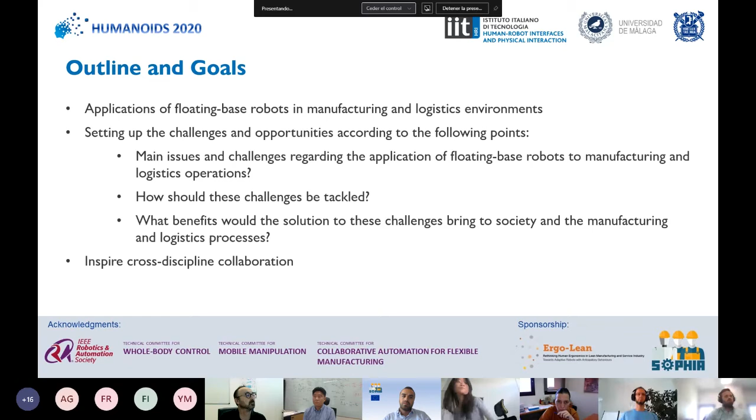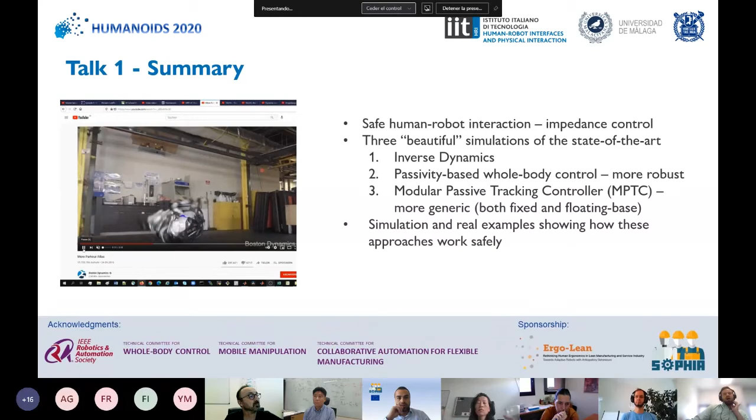So let's go forward. So the first talk is given by Dr. Johannes Englsberger from the German Aerospace Center, or the DLR, and this talk is entitled "Who Will Dare to Work Side by Side with a Potentially Exploding Robot?" And he's giving some thoughts and insights about truly robust and safe floating-base robot controllers. So I will just give some of the points he mentioned in his talk.

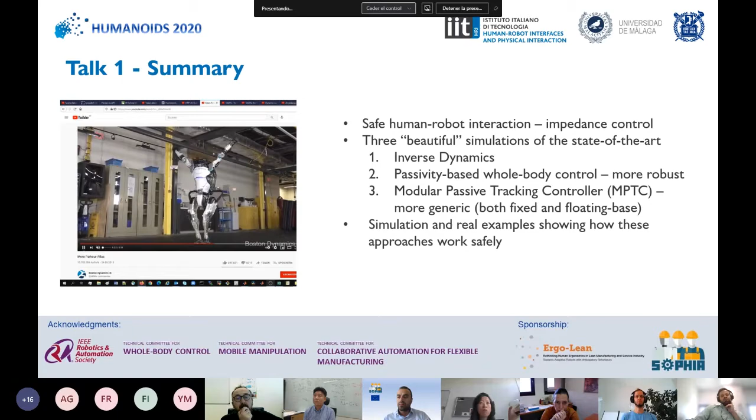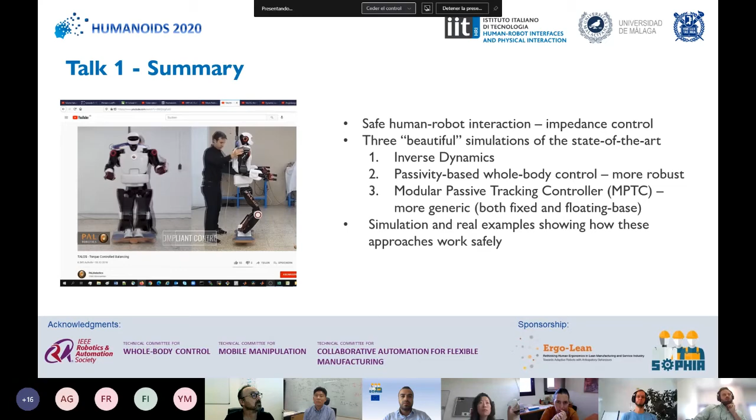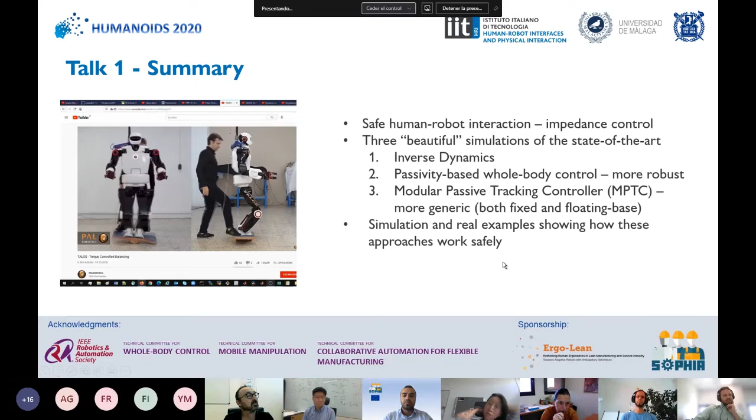So his talk is related to safe human-robot interaction, and he said that to achieve this safe human-robot interaction, the best approach is to use impedance controllers, in which case we need torque-controlled robots. This talk is related to humanoid robots. And he presented, as he said in the video, 3 beautiful simulations of the state-of-the-art controllers, which are these 3.

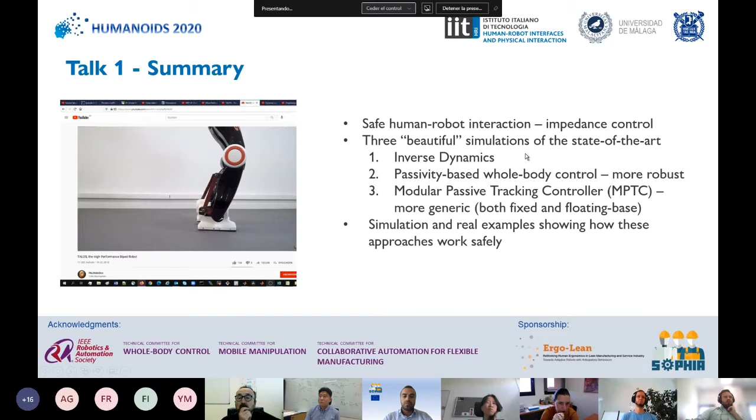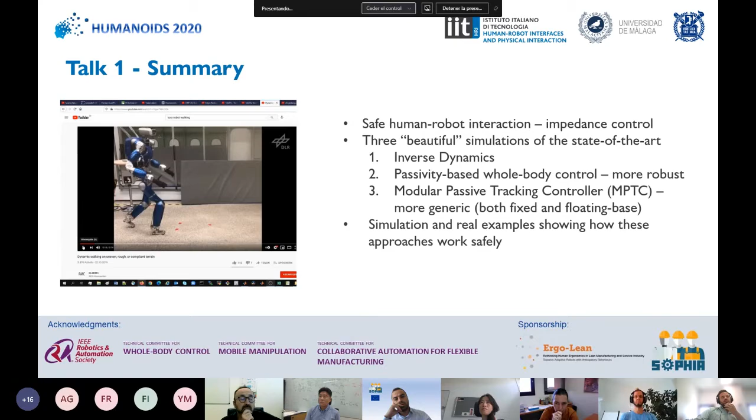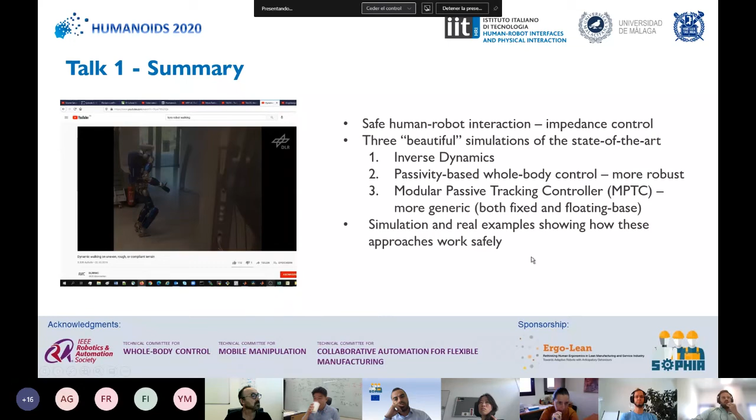Inverse dynamics, passivity-based whole body controllers, which he said are more robust than inverse dynamics, and modular passive tracking controllers, or MPTC, that are more generic because they can work both for fixed and floating-base robots. And he also shows some simulation and real examples showing how these approaches work safely both for robot control and physical human-robot interaction.

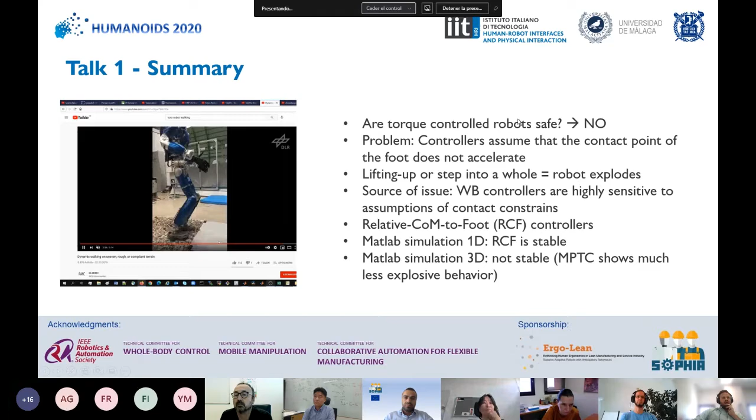But after explaining that all these impedance controllers are safe for the robot itself and also for the physical interaction with the human, he raised this question: are torque-controlled robots safe? And he said, actually, no. So all of the things that he explained before are based on one assumption that he claims is the problem of this kind of controller.

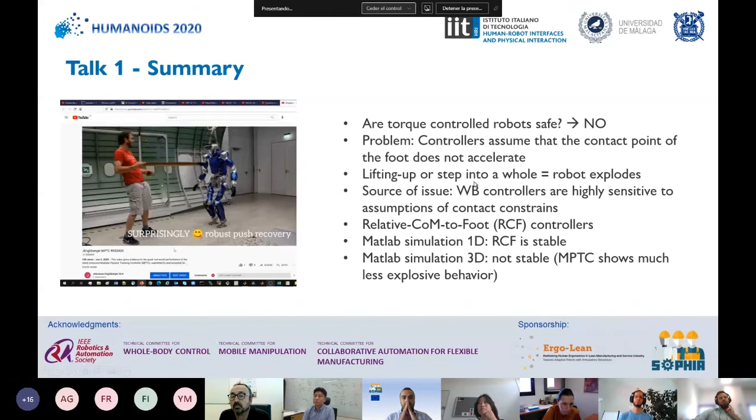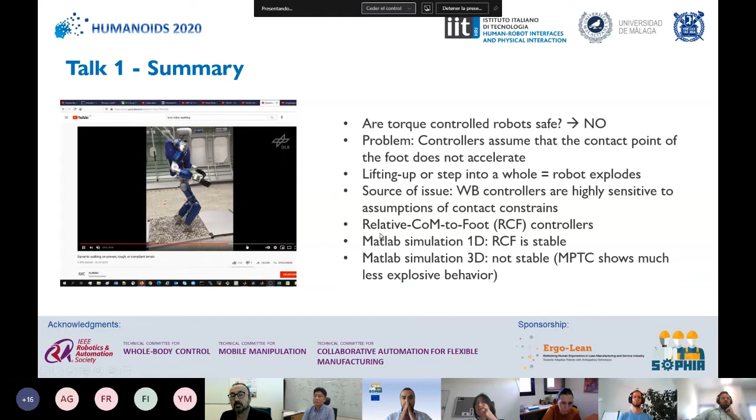So the problem is basically that the controllers assume that the contact point of the foot of the robot does not accelerate. When this assumption is true, there is no problem. But when this assumption is corrupted, like in the case of lifting up the robot, or when the robot steps into a hole, the robot explodes, as he shows in some simulations. And the source of this issue is that whole body controllers are highly sensitive to the assumption of contact constraints. So he proposed this new method, the relative center of mass to foot controller, RCF.

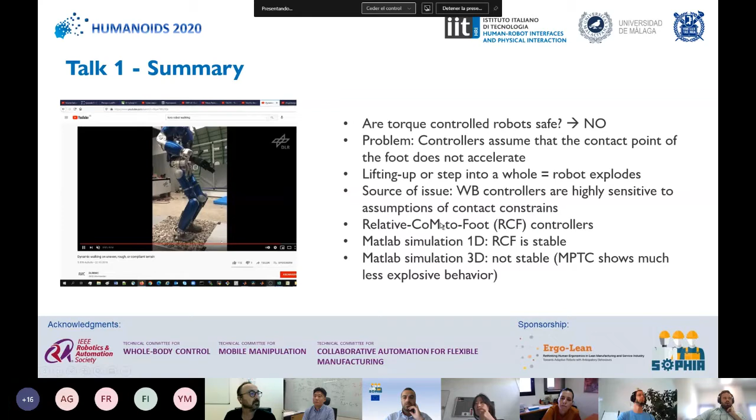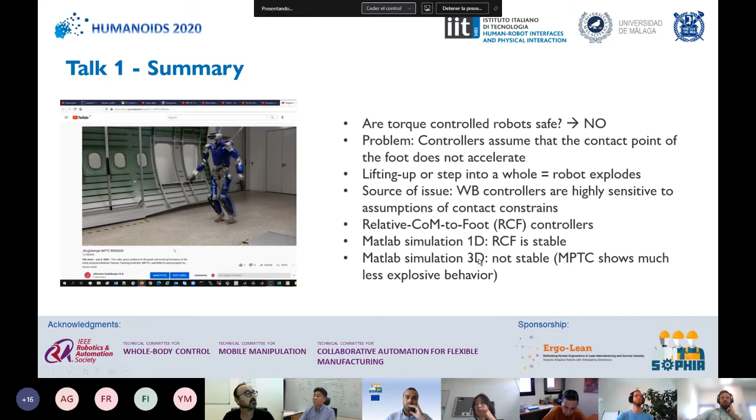And he showed two simulations, both of them in MATLAB, one in 1D, in which we can see that the RCF is stable, and one in 3D that shows that in this case RCF is not stable, and also shows that MPTC shows, let's say, much less explosive behavior.

So the key of his talk is that making assumptions regarding contact constraints seems to be dangerous, and he posed this question to all of us, which is, how could we solve the problem? He also said that passivity-based controllers are better than inverse dynamics for human-robot interaction. But these kinds of controllers also have the problem of designing stiffness and damping.

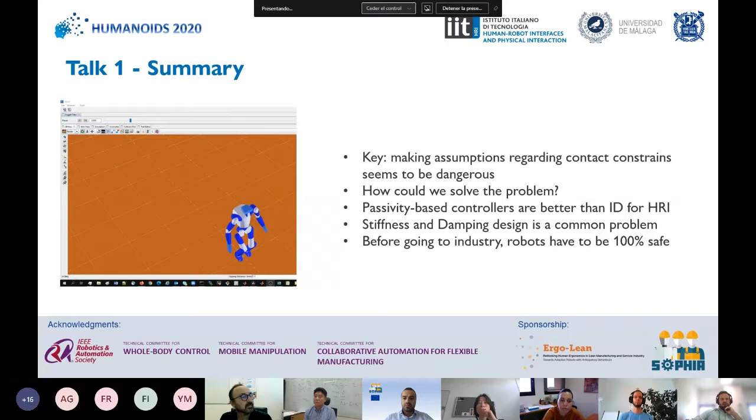One of the outcomes of this presentation is that Johannes says that before going to industry, robots have to be 100% safe. So based on this talk, there are, in my opinion, these discussion topics, and as I said, you can also give your point or ask your own question. The first question is one I will ask to all of the speakers, which is, how far is this approach or solution from being integrated in a real or commercial industrial application, and what challenges are to be solved?

Another question could be, how could we solve the problem illustrated by Johannes? What are some approaches on robust whole body controllers, safe whole body controllers, and safe physical human-robot interaction? So first of all, I would like to thank Johannes for his presentation. I would like to ask him if he wants to add something to this summary, to these topics, or explain something he didn't comment on in the videos.

Thanks so much, Juanma. Seriously, I couldn't have summarized the talk or these issues any better. Thanks so much. I clearly see that you watched the video in detail. That's really nice. Yeah, actually, I really liked the video. It was very, very interesting.

Yeah, thanks very much. So maybe I can start answering some questions, and obviously in parallel people can try to answer questions or also ask questions. So how far is our approach? Actually we have several approaches. One is this modular passive tracking control, MPTC. Then this recent one, this relative center of mass to foot, RCF control, which I presented at Humanoids actually.

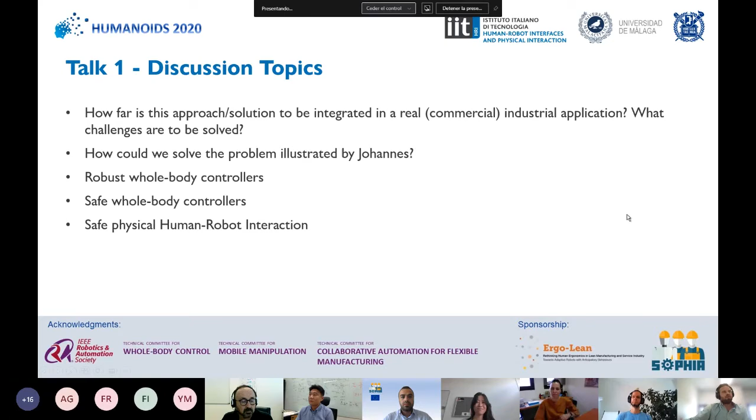So the next talk was presented by Jaeheung Park from Seoul National University, who is also one of the co-organizers of the workshop. The title of the talk was "Difficulties in Assembly Tasks for Floating-Base Robots."

In his talk, he presented a project that consists of assembling a chair from instruction figures. One of the challenges was to recognize instructions and find the relations between different parts. He also presented different approaches done by other universities and his own, all of them based on fixed-base robots.

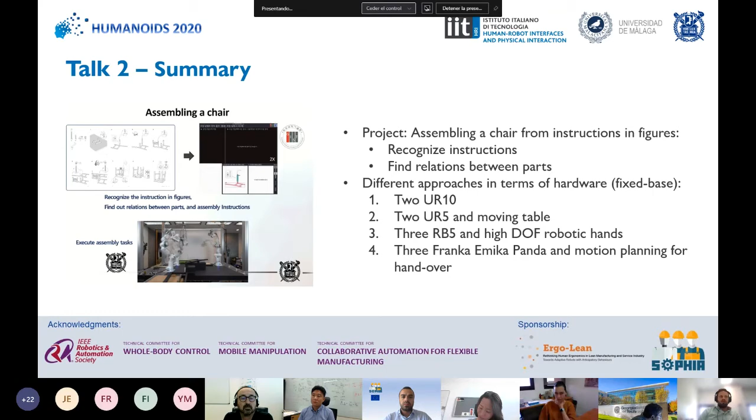These approaches include one using two universal robots UR10, another using two universal robots UR5 with a moving table, another using three RB5 robots with high-DOF robotic hands, and the fourth, which is the approach they followed, using three Franka Panda robots with complex motion planning for handing over.

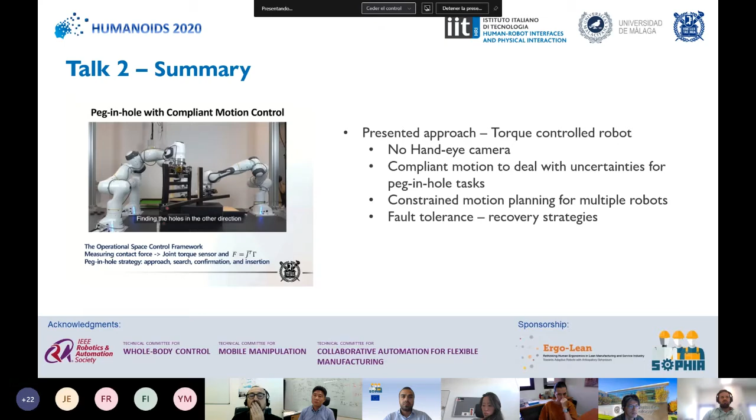In the presented approach, they use torque-controlled robots without a hand-eye camera. They also presented their approach on compliant motion to deal with uncertainties for peg-in-hole tasks, constrained motion planning for multiple robots, and some fault tolerance and recovery strategies. All of these works related to assembly from instructions were based on fixed-base robots.

At the end of his talk, he stated two points regarding the benefits and challenges of using floating-based robots. According to him, the benefits are that they have a larger workspace, we will need fewer robots and less regrasping, and there will be more redundancy in the system. On the other hand, the challenges are that the number of uncertainties will increase, so we will probably need precise localization and visual servoing.

The calibration, which he also explained was already challenging for fixed-base robots, will be even more challenging. It will also probably require very complex motion planning regarding high-DOF robots and model uncertainties.

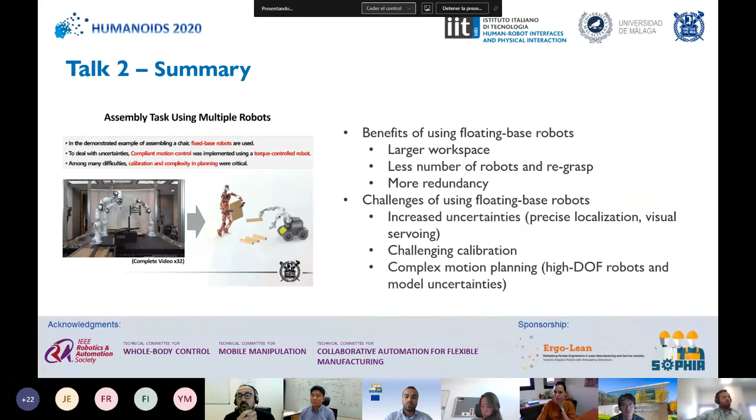From this talk, I would like to express some discussion topics based on my own thoughts. Again, if anyone in the audience has other questions or curiosities, please feel free to ask. The first question I'm asking all speakers is how far is this approach from being integrated into a real or commercial industrial application, and what challenges need to be solved. Other discussion points: what are the strategies for assembly for floating-based robots? What are the challenges of using this kind of robot in an assembly task, some of which were already stated by the speaker? And what are the challenges and benefits of using multiple robot motion planning? So, John, if you want to add something to this, or if there are any questions from the audience, please feel free to talk.

Okay, so there is a question. Hello, thank you for your presentation. I have one question about the application for peg-in-hole: what is the clearance that you implemented for the assembly? Also, I couldn't quite see the control equation that you presented. You were saying it's a compliant control, but I wasn't sure I understood, so I wanted to ask what type of controller you used for that application.

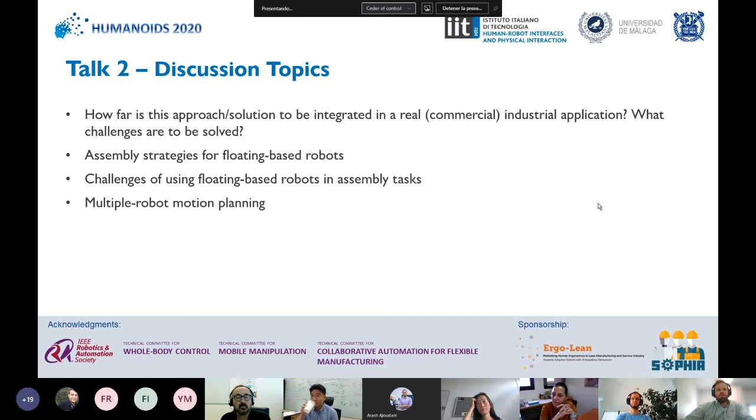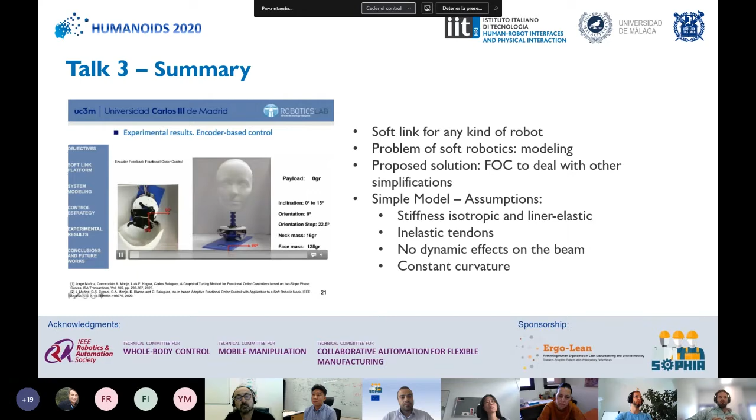Her talk is titled Fractional Order Control of Soft Robotics Links. In her talk, she presents a soft link for any kind of robot, but applied mainly for the neck of humanoid robots. She says that one of the problems of soft robotics is modeling, because it's very hard to model, so the proposed solution is to use fractional order controllers to deal with model simplifications. In their approach, they use a simple model under the assumption that the stiffness is isotropic and linear elastic. They use inelastic tendons, there are no dynamic effects on the beam, and there is constant curvature of the beam.

I don't know why it's not okay.

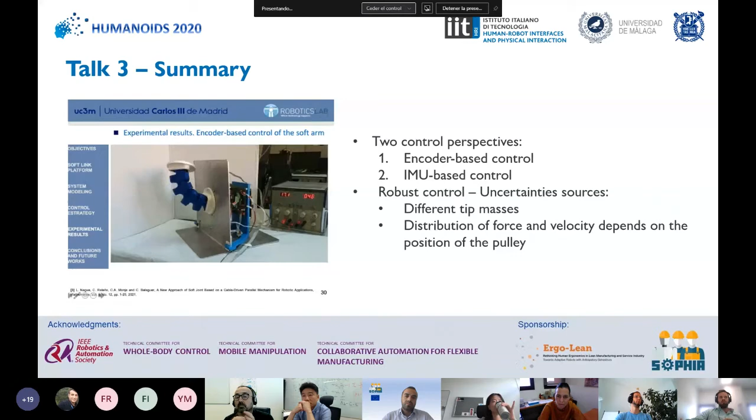They propose two control perspectives: encoder-based control and IMU-based control. This is a robust control strategy, and the uncertainty sources are that the masses at the tip of the soft link may be different, and the distribution of force and velocity depends on the position of the pulley. They developed fractional PD and PI controllers, showing simulation and experimental results for a soft neck for a humanoid robot.

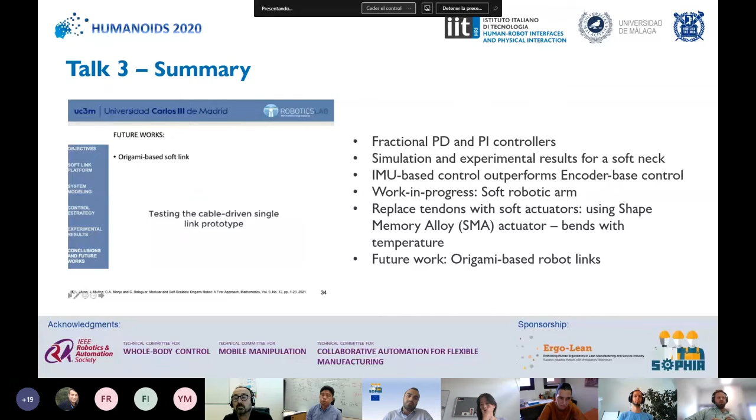Based on their results, the IMU-based control outperforms encoder-based control. She also presents their work in progress on a soft robotic arm, and the possibility to replace the tendons with soft actuators. She proposed using shape memory alloy actuators, which bend with changes in temperature. She also presents future work, like this origami-based robot you can see here.

From this talk, I selected these discussion topics. As I said before, if someone wants to ask or add something, feel completely free. These discussion topics were selected based on the talk, and it's the same question for all the speakers: how far is this approach to being integrated in a real industrial application, and what challenges are yet to be solved?

Other discussion topics are soft robotic modeling, like strategies using complex or simple models. What strategies are there for soft robotic control? What about using soft actuation, like the actuators proposed in Concha's talk? And a more personal question: how to scale up this soft robotics to be integrated into, let's say, practical manipulators. Thank you, Concha, if you want to add something or if there are any questions.

Thank you very much, Juan Manuel, and all the organizers for inviting me. It's my pleasure to be here sharing this research. I would say we are starting, because this is a proof of concept, right? But we are quite happy with the first results. In fact, this proposal is under a patenting process with an international enterprise. We are working together on industrial thesis to apply this to real robots.

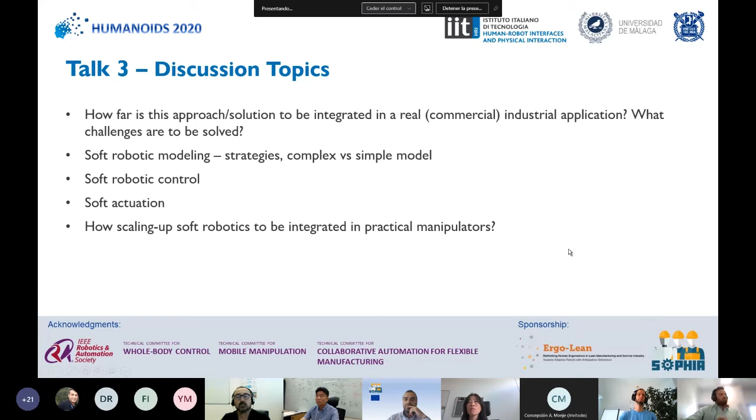So the next talk was done by Professor Dongheui Lee from the Technical University of Munich, and the title of the talk is Collaborative Robot Programming for Manufacturing. In this talk, she raises up how robot learning could enhance robot programming for manufacturing, and she basically shows four strategies. The first one is robotic learning by kinesthetic teaching.

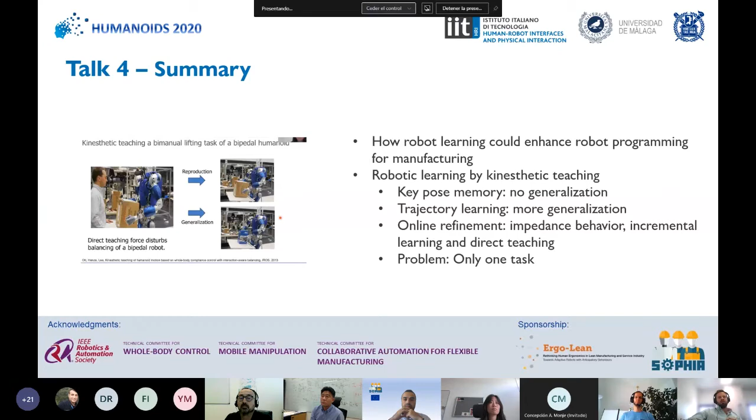She said that this kind of strategy is the use of pose memory, which you cannot generalize. Then the use of trajectory learning includes more generalization, and in the end, the use of online refinement includes some impedance behavior, incremental learning, and direct teaching. One of the main problems stated for this kind of strategy is that it can only be used for one task.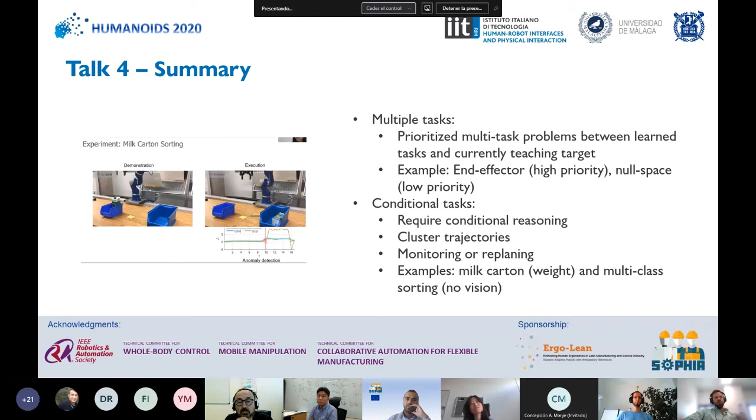So trying to solve this problem, she also showed another approach, which is the use of these learning strategies for multiple tasks. In this one, they prioritized the tasks. As an example, she showed one robot application in which the end-effector tracking has a high priority, and then the null space has a lower priority.

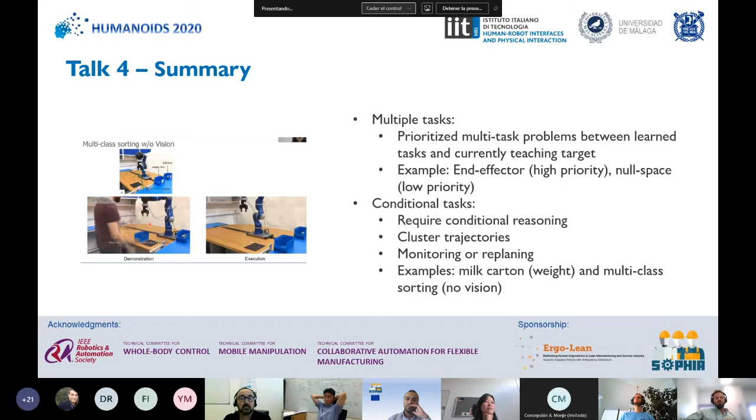Another work she presented is the application to conditional tasks. In this case, it requires conditional reasoning. It requires also clustering the trajectories, and then monitoring or replanning based on this learning. She also showed in the video a couple of examples of replanning, learning how to replan based on the weight of the object the robot is grasping, and also a multi-class sorting experiment, which is the one we can see now in the video.

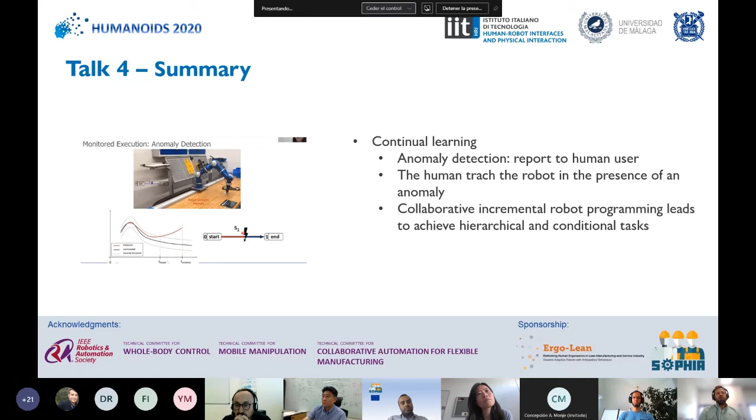The last approach she presented is called continual learning. This one requires detecting anomalies. In this approach, if the robot detects an anomaly, it has to report to the human user. Then the human user teaches the robot, trying to teach how it should behave in case this anomaly repeats in further cases.

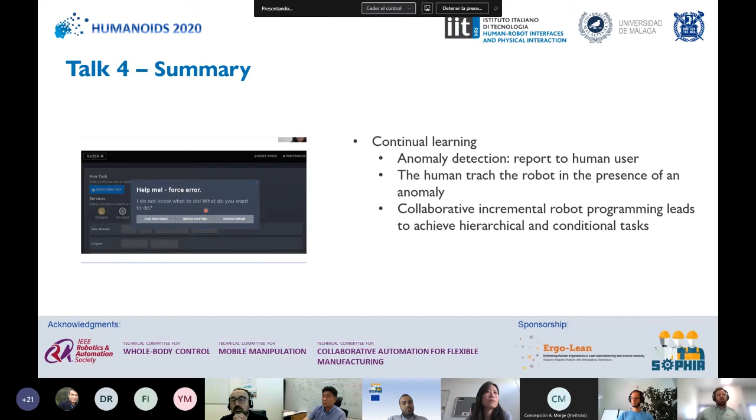One of the statements of this talk is that collaborative incremental robot programming leads to achieving hierarchical and conditional tasks. So from this talk, again, there is the same question I am asking all the speakers: how far is this approach from being integrated into a real industrial application, and what challenges need to be solved?

Apart from this, there are other questions or discussion topics, such as how to exploit these approaches for floating-based robots, as in the case of loco-manipulation. Some other points to discuss are the learning strategies for robot programming, and what skills the robot has to have or learn, like multitasking, conditional tasks, continual learning, or fault tolerance.

One other question that probably we can take at the end, when I present my own talk, is about the teaching interface, because as you will see, we are also using some kind of interfaces for joint human-robot action. So probably I will retake this question at the end to give more time. Again, if someone has any question, also Dongheui, if you want to add something on this, please go ahead.

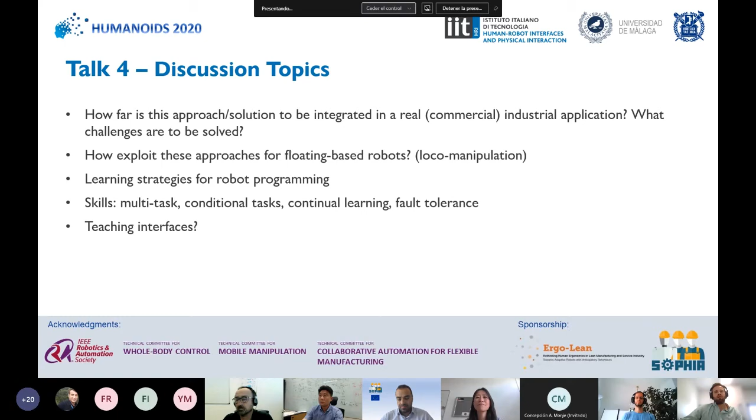So the next talk was given by Professor Jesus Gomez de Gabriel from the University of Malaga, and the title of this talk is floating platforms and physical human robot interaction and end effector considerations. So in his talk, Jesus raises the problem of safe interaction in physical assistive devices, and he also said that one of the less tackled approaches is the direct physical contact between robots and humans. As all of you probably know, the traditional approach is to try to avoid this contact.

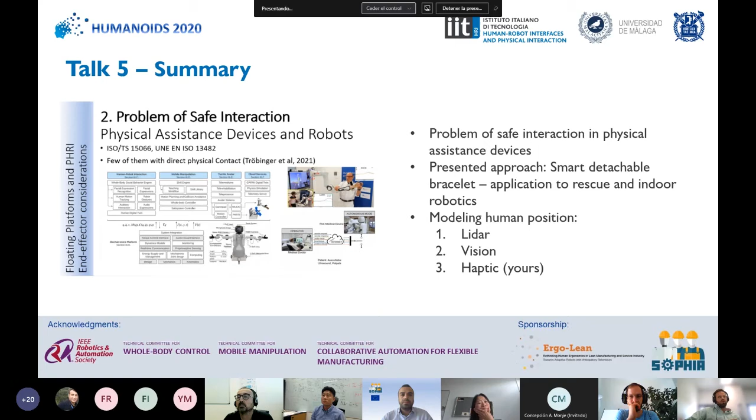So he presented some approaches. One of them is a smart, I don't know why this is not okay, yes, a smart detachable bracelet, as you can see in this picture, and its application to rescue and indoor robotics.

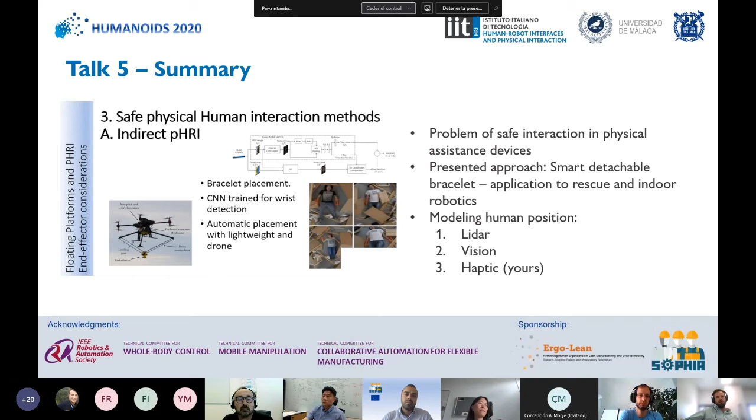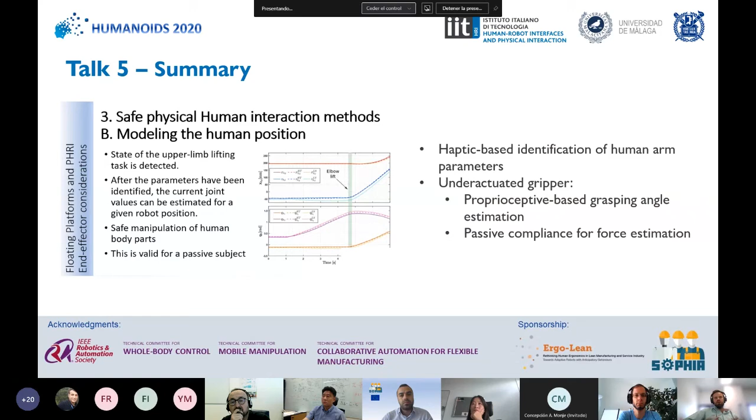He also presented an underactuated gripper they developed at the University of Malaga based on proprioception, and some words about proprioceptive-based grasping angle estimation and passive compliance estimation in terms of human-robot interaction.

He also presented this new family of grippers, which are called rolling fingers grippers. The goal is to reduce the number of actuators through the design of a new family of grippers for platform optimization. He presented that there are several approaches to this kind of problem: using single complex hands, using variable friction hands, and using active surface hands. Another kind of solution is the one they propose, which is this rolling fingers gripper.

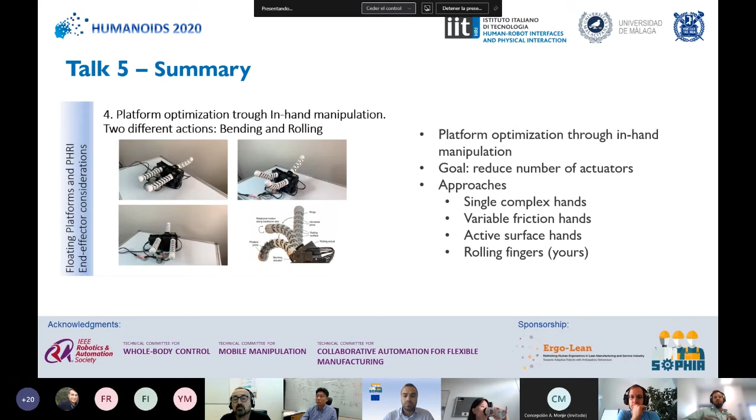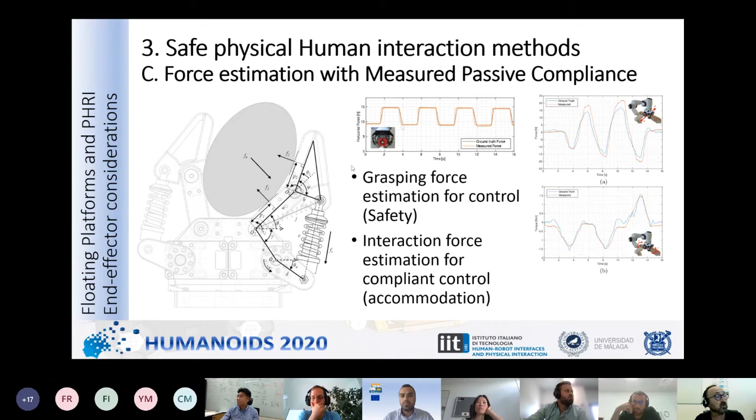These are lateral forces. And here you can see the difference in the compression force, in this case the horizontal forces, between a sensor we placed inside the gripper and the estimated forces. I think it's fair enough.

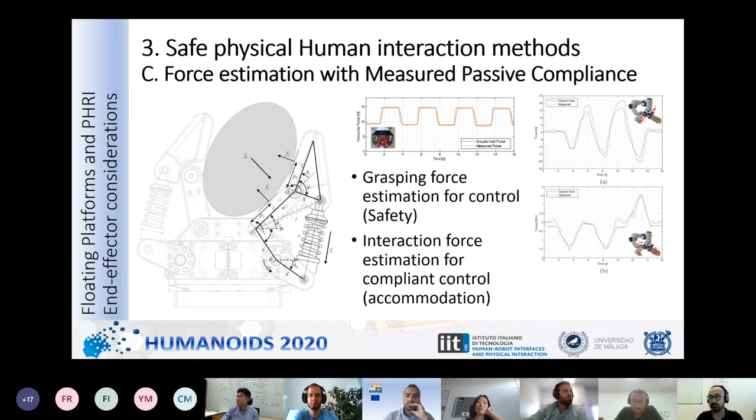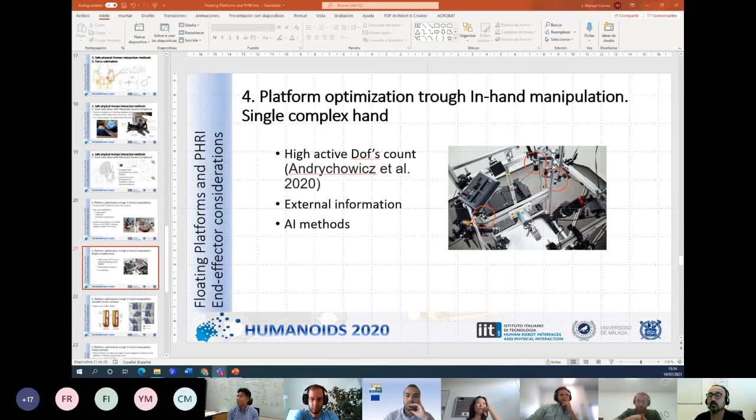Okay, I understand. Another question was about modeling the human arm. You put a kind of sensor here, and then you said that you considered anthropomorphic dimensions of the human to model the arm. I was wondering which equation you used, because I couldn't see it in the presentation. Maybe a bit of detail.

Okay, let me show you. We use two methods. We did experimental methods with the Hough transform and least squares methods. We use both, and we compare the results of both methods. Here I can show you the reference to this work.

Jesus, we are not seeing the screen now. Sorry. Let me show you. Are you seeing my screen? No. Yes. Okay.

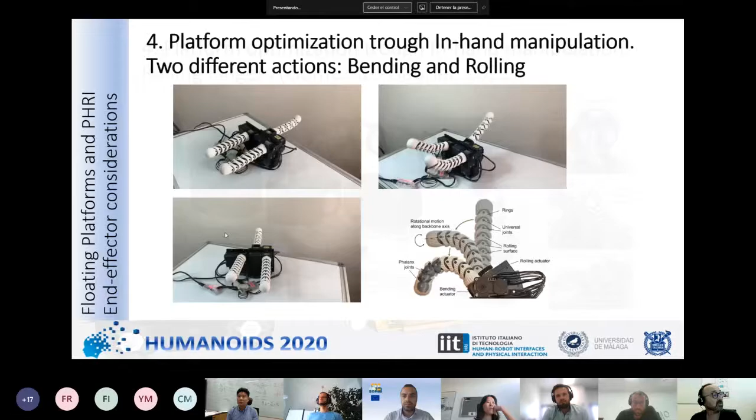This is the reference here, Ruiz-Ruiz 2020. Yes, this is the one, and those are the methods that we use, which are the Hough transform and least squares. If you have some additional questions, you can send us an email and we can discuss this.

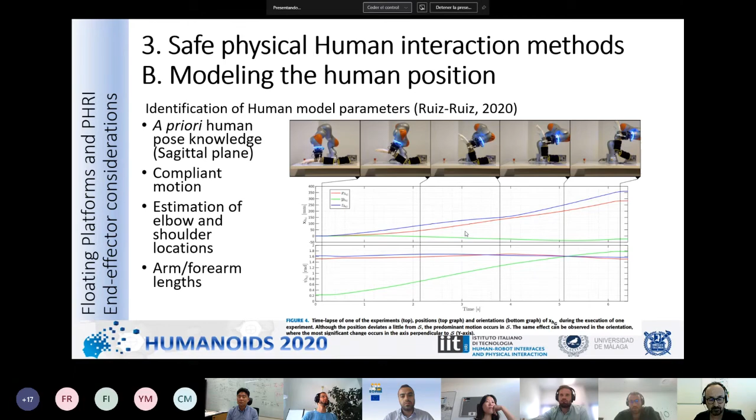I especially liked the last one, the rolling fingers. I think the design and the functionality must be very nice. I have one question about that. It seems very effective for manipulating round objects. How about objects that are not round, like a cube? Is it still going to work very well? Have you ever tried?

The goal of this design was to manipulate human limbs, so we didn't think especially about manipulating hard square objects. But this is something we want to test from now on, because we just made this design, and we want to test it with a new surface coating to get a better grip on the surface of the fingers. Probably this will be published soon if we have success.

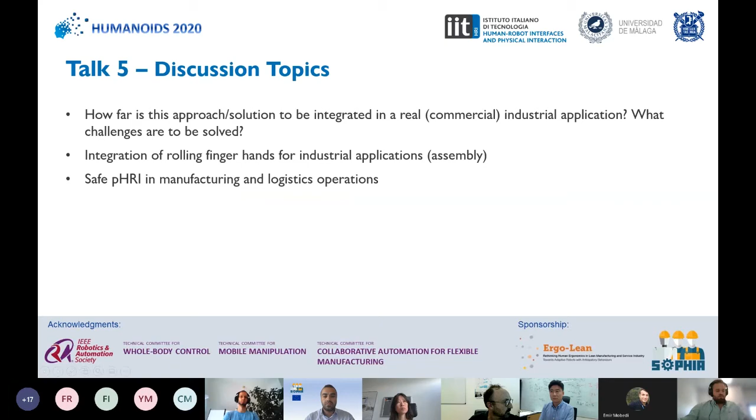Okay, can you see my screen now? Yeah. Okay, so let's go to the next presentation.

So the next talk was given by Jun Ueda and Michael Libretto from Georgia Tech. And the title of this talk is Posture-Dependent Robot Stabilization of Flexible-Based Manipulators. So in this summary, please excuse me because I am not an expert on this topic, so I will try my best to explain what you propose in this talk. If you have some other thoughts or you want to add something, or maybe if I made any kind of mistake, please correct me.

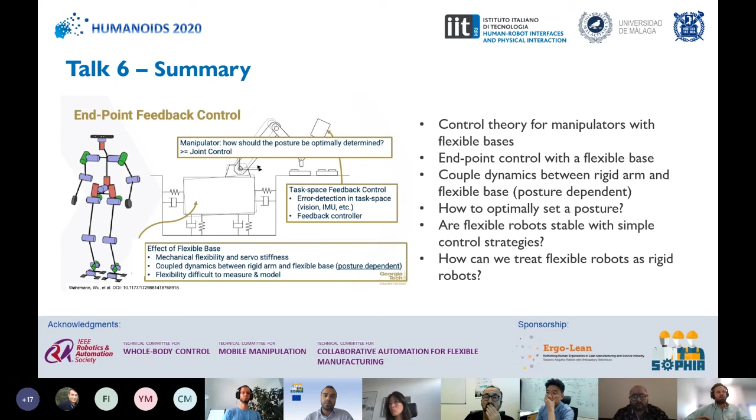So in their talk, they present some control theory methods for manipulators with flexible bases. So the goal is to try to find a control method to control the endpoint of a robot with a flexible base. One of the statements is that the coupled dynamics between rigid arm and flexible base are posture dependent. So they try to answer these questions: how to optimally set a posture, are these flexible robots stable with simple control strategies, and how can we treat flexible robots as rigid robots?

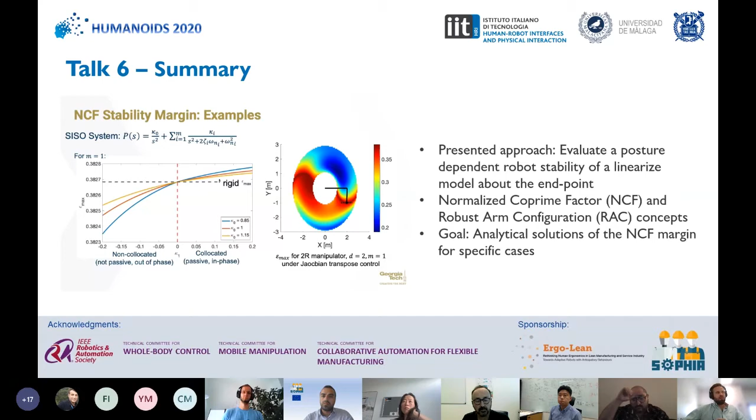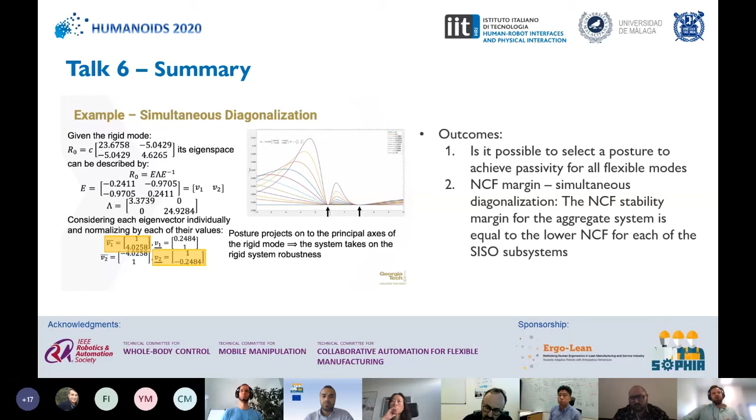So in this regard, they presented an approach to evaluate posture-dependent robot stability of a linearized model about the endpoint. They describe the normalized coprime factor and robust arm configuration concepts. And the goal is to try to find an analytical solution of the NCF margin for specific cases. Basically, the outcome of this work is that it is possible to select a posture to achieve passivity for all flexible modes. And regarding the NCF margin, with simultaneous diagonalization, the NCF stability margin for the aggregate system is equal to the lowest NCF for each of the SISO subsystems. So basically, these were the outcomes of their work.

Thank you for that introduction. As far as your first discussion point goes, the real application of this work is actually very doable at this point. The normalized coprime factor stability margin is incredibly common in the realm of H-infinity control. So as long as you can describe the system workspace in terms of that metric, you should be able to maximize your passivity and similarly your normalized coprime factor stability, dissipativeness, for particular postures in the workspace within the neighborhood of your desired control task.

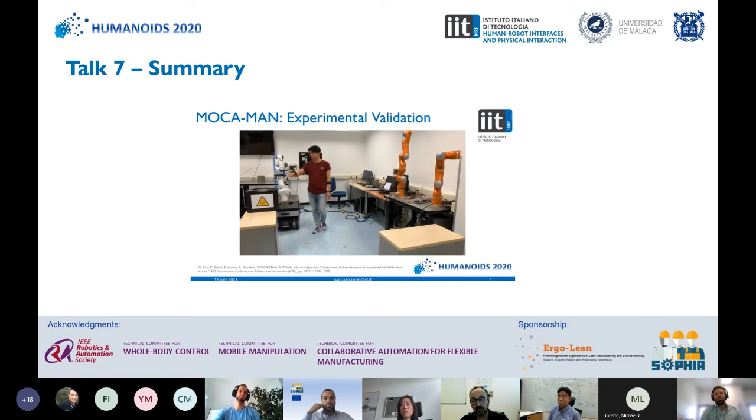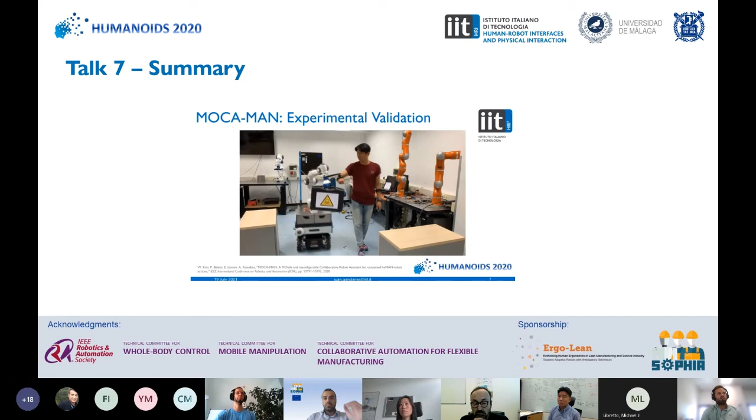So the idea of this MOCA-MAN is to put together the benefits of using supernumerary limbs and cobots. The idea behind this concept is that you can have a mobile manipulator and an attached physical interface, which you can use to attach to the robot to do some kind of local manipulation task.

So one of the problems of these interfaces presented before is that it uses a non-industrial-like design, because it required an EMG sensor to try to estimate the commands from the human to the robot, and it also included a magnetic clamp so that the human can attach to the robot, with a force torque sensor and admittance controller to command the robot locally.

So from this problem, we designed a new industrial-like interface, which is the one that you are seeing in the video. It is basically a handler with a force torque sensor and a buttons board, which the worker can directly grasp to carry out some local operation task. And with these buttons, the worker can command different things to the robot, like to change from more priority locomotion to more priority manipulation, this kind of stuff.

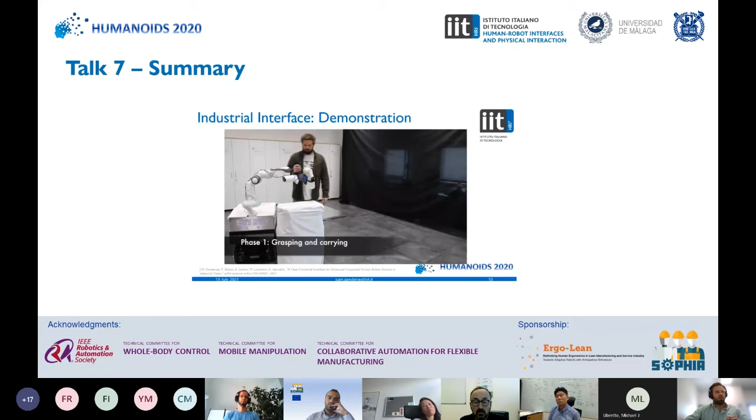Along with this, we also presented the whole body impedance controller of this kind of robot, which includes a torque-controlled robotic arm.

One of the drawbacks of this platform is that with the use of torque control robots, we don't have too much high payload, which is a requirement for many industrial applications.

So in this other work, we present the use of this mobile manipulator, which is based on the previous concept. In this one, we are using a Universal Robot UR16, which has a higher payload.

So in this case, the whole body controller is a little bit different than the one presented before, because with this one, as the robot doesn't have the torque sensor on the joints, we couldn't include this impedance behavior. So what we have is this admittance interface with an admittance controller based on the force exerted by the human, and this velocity-based whole body controller.

We developed some tests of this robot for this overhead drilling task, which is very common in industrial applications. And we are right now carrying out some usability studies, trying to understand what is the user acceptability of this kind of technology.

So yeah, actually regarding the design, the thing is that as we are using this kind of cobot, and as probably you can see in the video, in this one.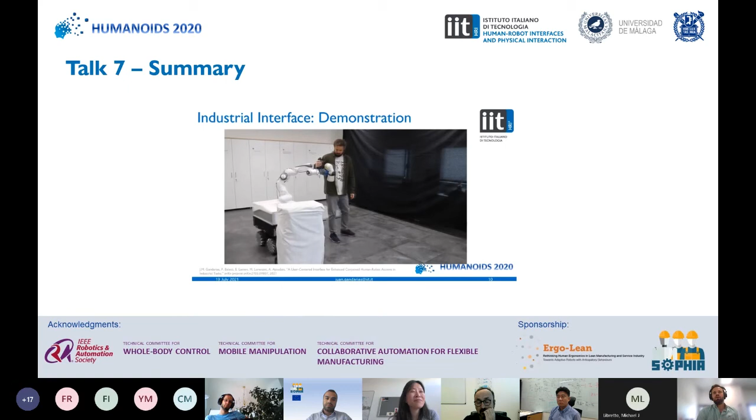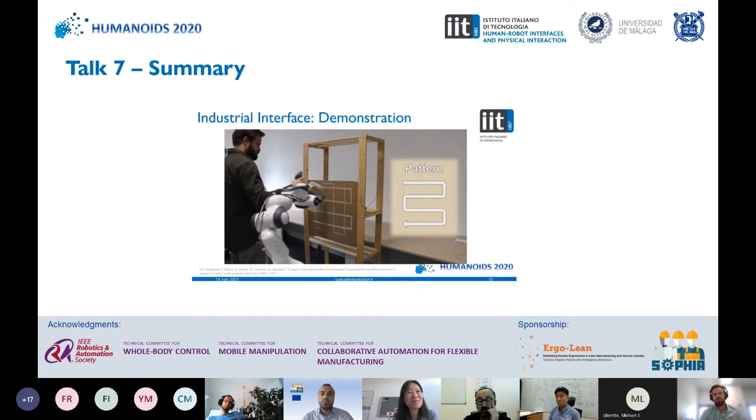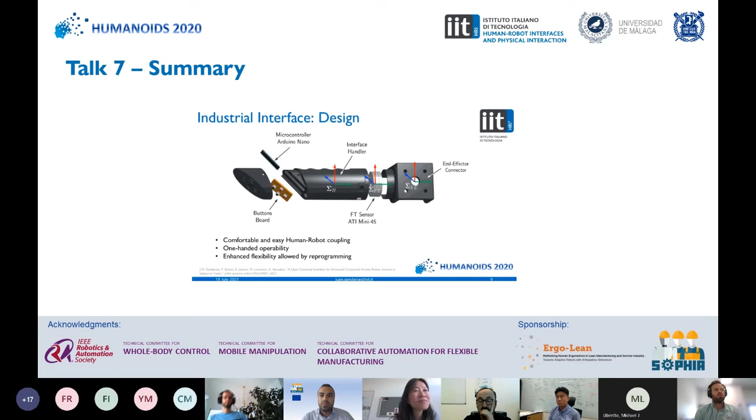As you can see here, there still are some constraints on the human motion, but most of them come from the task itself. The human is constrained, but if the human had to do this task without the robot, probably the constraints would be the same. So all this motion constraint came from the task. Of course, there are safety concerns regarding the distance from the base to the human that we have to consider. But apart from that, in this usability study we are carrying out, we are considering this kind of factor, asking users if they felt comfortable during the task, or if there was something inconvenient or uncomfortable.

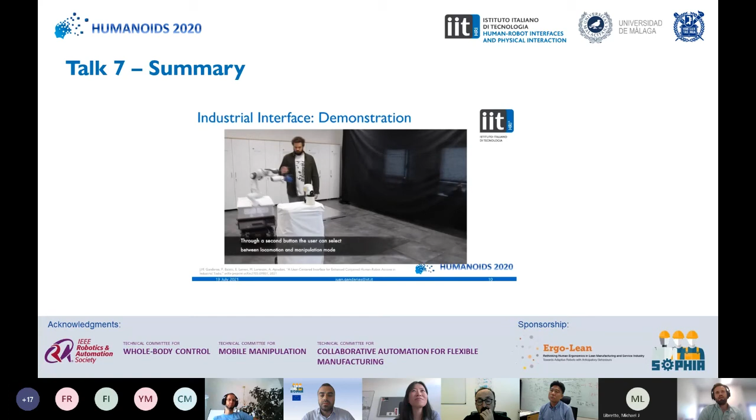The preliminary results show, as Juanma was mentioning, there's very little difference between what the person is doing with and without the supernumerary body. This suggests that these systems impose minimal constraints, and people can perform their jobs more ergonomically, but also more naturally, as if they were doing it without such assistive systems.

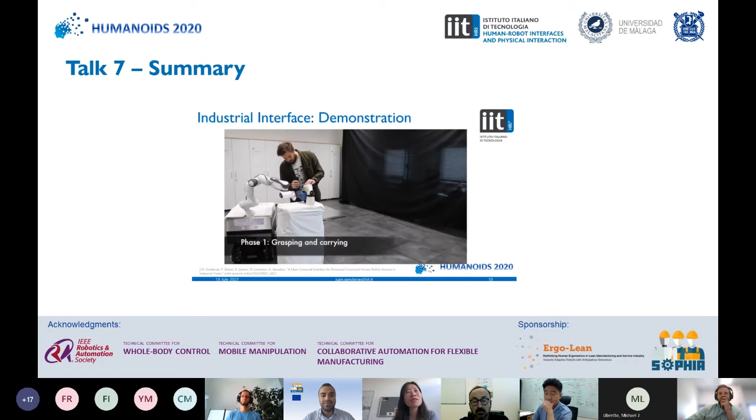If I may, one more question: what would be your ideal system setting? What kind of sensor would you want to have, or not? Would you want a force torque sensor at the end, or do you think an EMG sensor would really be enough? What would be your ideal choice, what would you want to have in the future?

Actually, the EMG sensor at the beginning we were using to send different commands to the robot. In the end, we are using this EMG sensor only to measure the muscular activity of the worker, to see how it's reduced when using the robot versus not. To move the robot, we are just using a force torque sensor included in the interface itself, and with an admittance controller, we map the forces exerted by the human into desired velocities for the robot. But one of the points we were also thinking about is that these force torque sensors are really expensive, so if we think about real industrial application, one of the most important points is how to reduce the cost.

One of the things we are thinking about is how we could use a different kind of sensor, a different kind of approach, to try to avoid using this expensive force torque sensor. I don't know if that answers your question. There are some applications like 3D mice, so maybe we were thinking of using something similar, but it was just an idea, we don't really know.

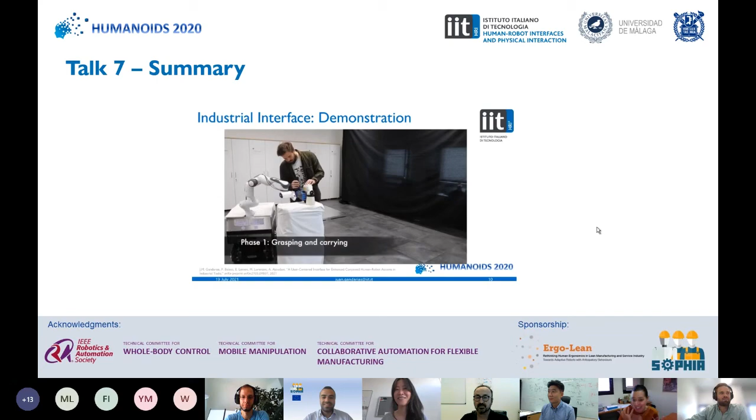Thank you very much. Same from my side, I think it has been the best way possible. Congratulations on the organization, and thank you for inviting us to this chat. I think it has been very, very interesting. Thank you.

Okay, thank you everyone. In my opinion, the only good point of having this virtual workshop is that we can have all the recorded talks on the website forever. That's the only positive point, in my opinion. I hope at the next conferences we can meet again in person and have another kind of interactive discussion. Thank you all, the organizers and the speakers, for all this interactive discussion and the super interesting talks. Hope to see you soon.